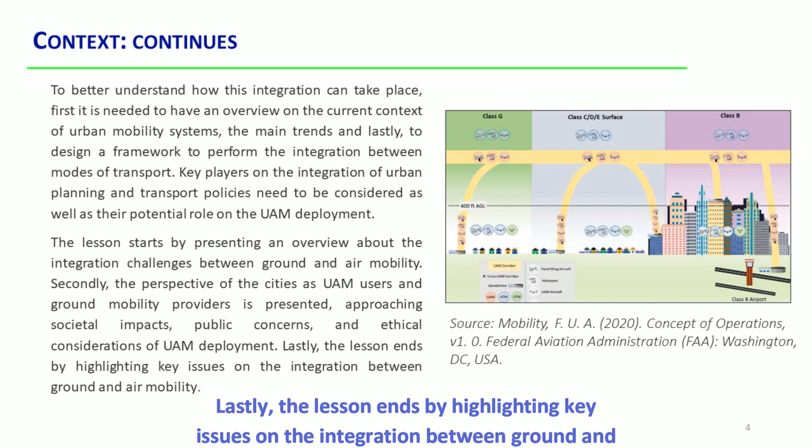Cities are grappling with negative impacts associated with transportation, such as congestion and pollution, as the world population increasingly concentrates in urban areas. To address these issues, cities are implementing various strategies like congestion charges, improving and promoting public transport, and encouraging non-motorized transport. Furthermore, technological advancements in urban mobility, such as automated, connected, electrified, and shared (ACES) mobility, are...

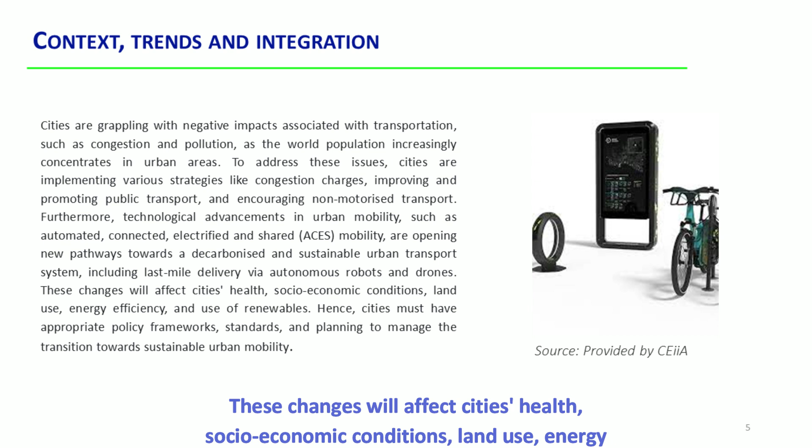...opening new pathways towards a decarbonized and sustainable urban transport system, including last-mile delivery via autonomous robots and drones. These changes will affect cities' health, socioeconomic conditions, land use, energy efficiency, and use of renewables. Hence, cities must have appropriate policy frameworks, standards, and planning to manage the transition towards sustainable urban mobility.

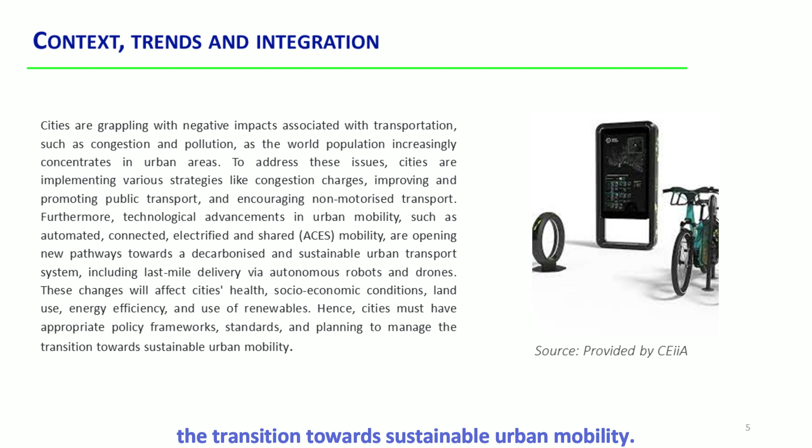Cities are soon expected to integrate the emergent concept of air mobility in specific niches of markets and transport segments. Air mobility is an aviation industry term for on-demand and/or automated passenger or cargo carrying air transportation services for urban environments. This innovative concept introduces an added mobility layer to a city's existing network, aiming to contribute for a better and more sustainable commuting system.

The lack of homogeneous guidelines and different levels of maturity from cities to face this emergent mobility challenge turns the subject of the integration of ground and air mobility crucial for a successful deployment of the latter one.

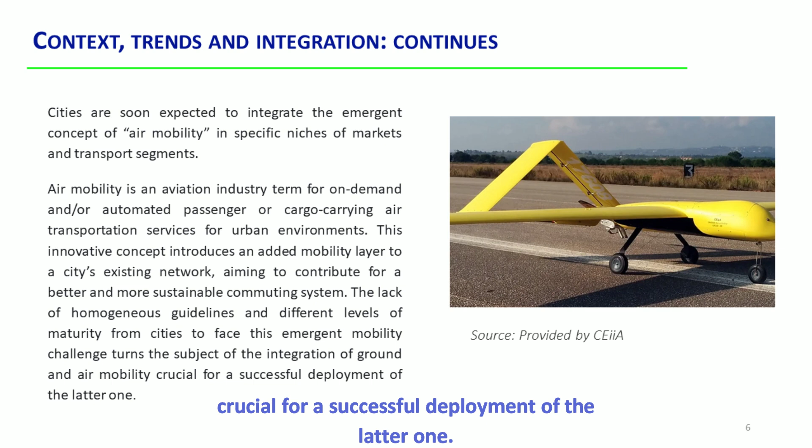Transport integration is an organizational process through which the planning and delivery of elements of transport system are brought together across modes, sectors, operators, and institutions with the aim of increasing the net environmental and societal benefits. The UAM deployment must be looked under an approach that promotes the integration of different modes of transport, considering three main imperatives: physical interface between modes, operational integration between modes, service integration.

An integrative framework for promoting physical interfaces between different modes of transportation should include examining spatial agglomeration concepts, optimizing multimodal networks, considering institutional dimensions and implementation drivers, and combining value creation and capture in infrastructure and spatial development.

The integration of physical infrastructures alone is not sufficient to achieve seamless mobility, and operational integration is necessary. The operational integration ensures that the offered network from different modes is compatible and creates added value with its integration. The operational integration is strongly related with the service integration layer, which allows a commuter to use the same service system to get different modes of transport within a specific area.

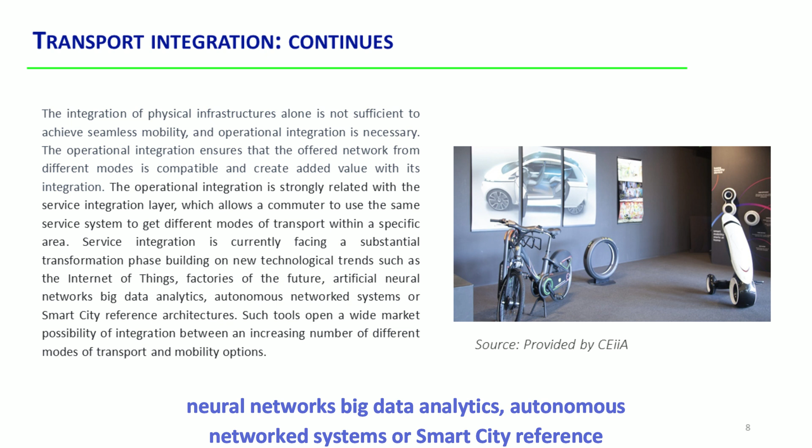Service integration is currently facing a substantial transformation phase building on new technological trends such as the Internet of Things, factories of the future, artificial neural networks, big data analytics, autonomous networked systems, or smart city reference architectures. Such tools open a wide market possibility of integration between an increasing number of different modes of transport and mobility options.

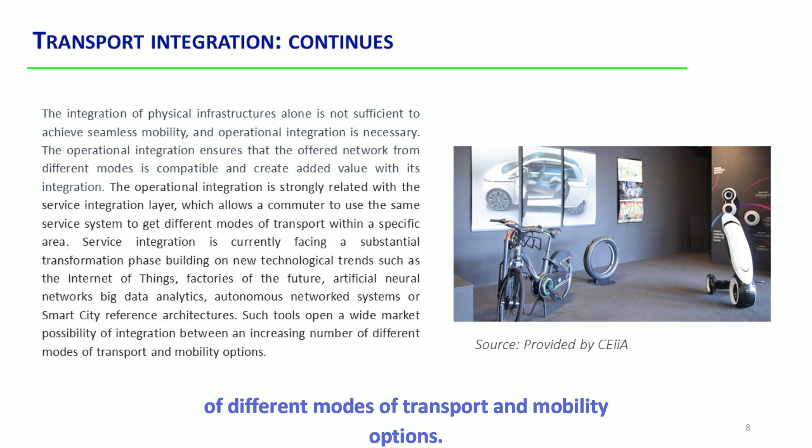The concept of smart city is a place where traditional networks and services are made more efficient with the use of digital and telecommunication technologies for the benefit of its inhabitants and business. A smart city goes beyond the use of information and communication technologies (ICT) for better resource use and less emissions, assuring a more interactive and responsive city administration, safer public spaces, and meeting the needs of an aging population.

In an era of increasing ICT to support urban functionalities, municipalities are also part of this ecosystem and have the potential to examine, understand, and define their own specific urban data, to work out and implement the necessary processes for data provisioning and data management, to build a powerful data infrastructure to support and automate these processes and to ensure their own municipal data sovereignty.

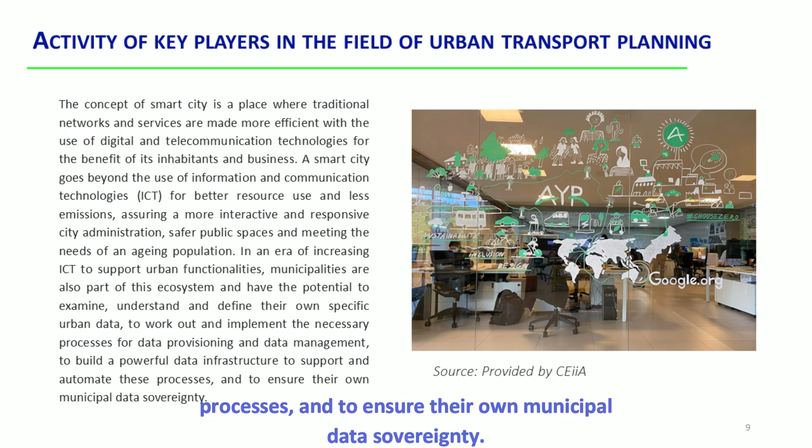The integration of air mobility in European cities faces emergent challenges, and three key players can provide guidelines and support to address them. The European Initiative, the marketplace of the European Innovation Partnership on Smart Cities and Communities (EIP-SCC), City Vitality and Sustainability (CIVITAS), and ELTIS offer tools, good practices, and communication channels to help cities become models of sustainable urban mobility.

EIP-SCC has a UAM action that steers its activities on smart mobility initiatives, interfacing or enabling UAM by addressing UAM interfaces with public transport, mobility as a service, ground infrastructure for UAM, and ATM-UTM concepts for UAM integration.

The third dimension of air mobility is still not a pertinent topic for most European cities, and therefore it is still not a relevant topic for CIVITAS and ELTIS, but it could be desirably included in SUMPs.

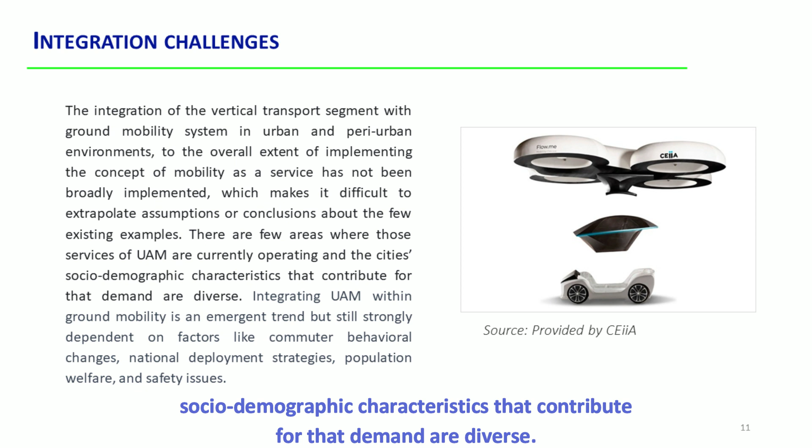The integration of the vertical transport segment with ground mobility systems in urban and peri-urban environments, to the extent of implementing mobility as a service, has not been broadly implemented, making it difficult to extrapolate assumptions from the few existing examples. There are few areas where UAM services currently operate, and the cities' socio-demographic characteristics contributing to demand are diverse. Integrating UAM within ground mobility is an emergent trend but still strongly dependent on factors like commuter behavior changes, national deployment strategies, population welfare, and safety issues.

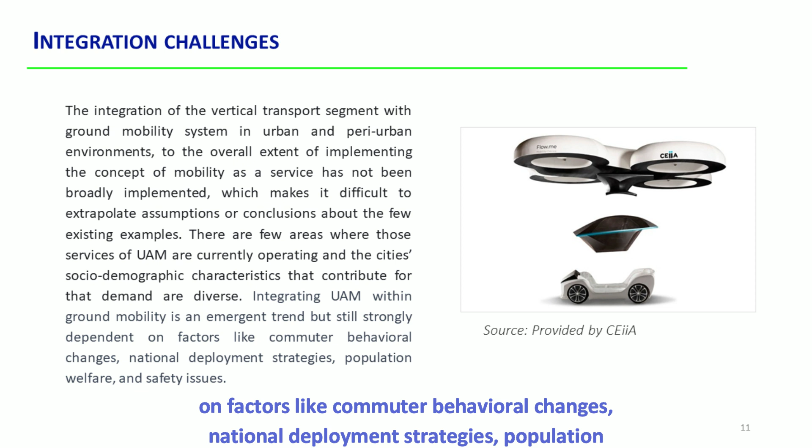The integration of UAM services in the overall urban transport chain must incorporate three main indicators of sustainability: societal impacts of transport activities, public concerns, and public acceptance and ethics.

Societal impacts refer to both potential benefits and negative impacts of UAM affecting society. The deployment of drones has potential benefits such as reducing traffic congestion and improving healthcare, delivery, and search and rescue services. However, concerns have arisen regarding job losses, limitations in adverse weather conditions, noise pollution, and aesthetic impact on the environment.

The deployment of UAM sustainable systems must consider public concerns and acceptance, including safety and security. Concerns include the consequences of malfunctioning navigation systems, collisions with people, cargo loss, and misuse of data or terrorist acts. Communication between drones and controllers using Wi-Fi networks is also vulnerable to security breaches.

To gain public acceptance, trust and transparency in UAM integration strategy are crucial.

UAMs also offer advantages for security purposes, such as providing broadband data rates in emergency and public safety situations, search and rescue, and creating unmanned aerial base stations during natural disasters or extreme events to improve coverage and save lives. They can also be used for surveillance during war situations and to avoid human casualties.

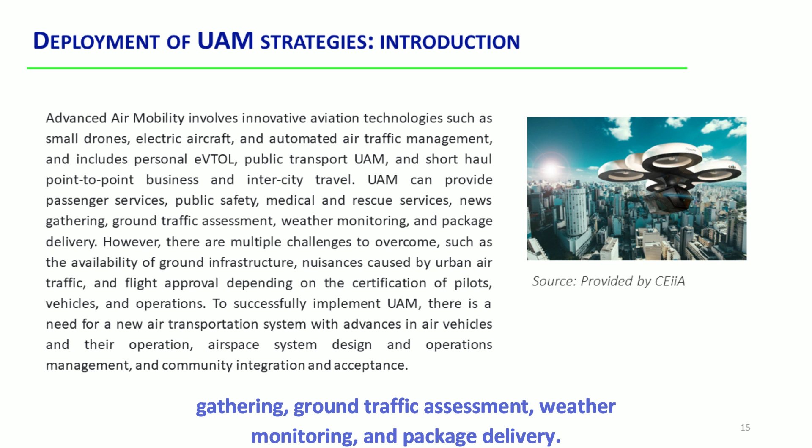UAM can provide passenger services, public safety, medical and rescue services, news gathering, ground traffic assessment, weather monitoring, and package delivery. However, there are multiple challenges to overcome, such as the availability of ground infrastructure, nuisances caused by urban air traffic, and flight approval depending on the certification of pilots, vehicles, and operations.

To successfully implement UAM, there is a need for a new air transportation system with advances in air vehicles and their operation, airspace system design and operations management, and community integration and acceptance.

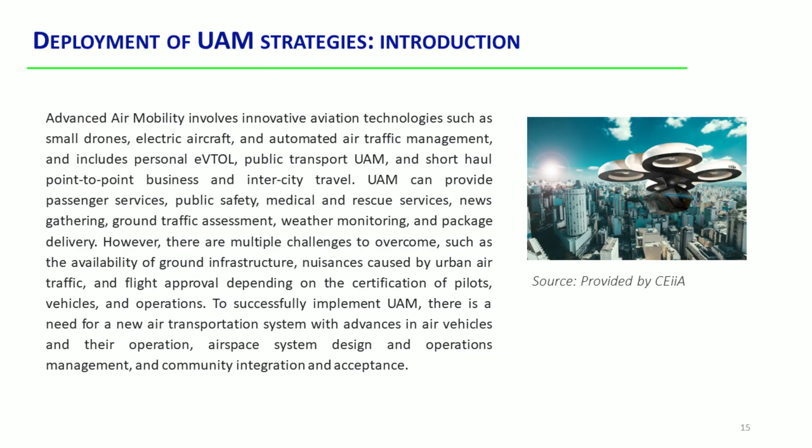The main factors expected to influence the implementation of urban air mobility strategies include economic drivers, regulations, technology development, social acceptance, and infrastructure.

In what refers to technology development, it is expected that the major contribution to UAM is vertical takeoff and landing, VTOL aircraft, which embraces the door-to-door, D2D paradigm. Other enabling technologies for UAM include short takeoff and landing, STOL aircraft, and personal air transport system, PATS aircraft.

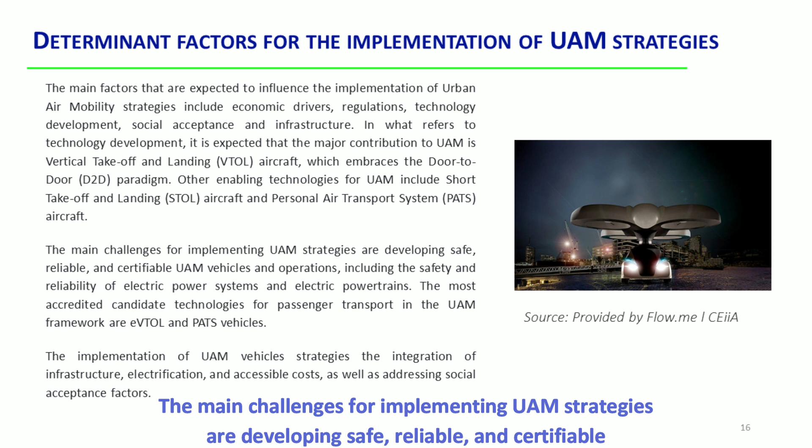The main challenges for implementing UAM strategies are developing safe, reliable, and certifiable UAM vehicles and operations, including the safety and reliability of electric power systems and electric power trains.

The most accredited candidate technologies for passenger transport in the UAM framework are eVTOL and PATS vehicles, the implementation of UAM vehicle strategies, the integration of infrastructure, electrification, and accessible costs, as well as addressing social acceptance factors.

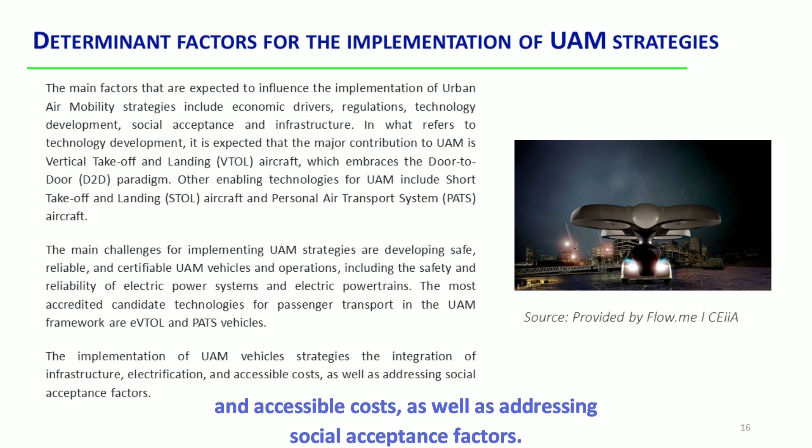Sustainability and technology integrability are critical aspects to consider in UAM infrastructure development, including the development of new runways on building roofs and the availability of STOL, VTOL, and PATS technologies. The integrability of these systems will have a significant impact on urban infrastructures.

A depth analysis of infrastructures and prices of public transport services is needed to ensure an optimal price and investment that affect acceptability. Improvements in endurance and weather resilience will depend on technological developments relating to vehicles, while integrability will involve regulatory aspects and urban infrastructures.

The integration of technology in multimodal transport requires digitization in road and air transport, and the integration of air and road traffic management systems. Urban air mobility UAM solutions can be applied to automated road transport for multimodal vehicles.

Pop.Up is a modular system for multimodal transportation that utilizes ground and airspace, consisting of a passenger capsule, ground module, and air module. Passengers can switch between modes of transportation, and the modules autonomously return to recharge stations after use. This system aligns with the deployment of UAM, providing both surface and air transportation to reduce city traffic congestion.

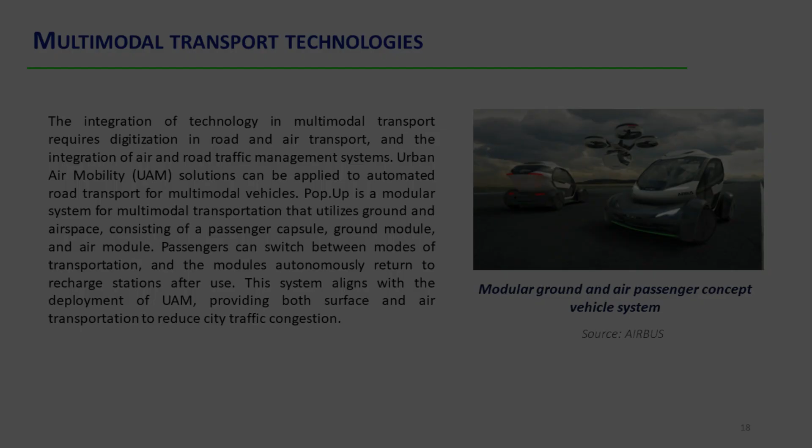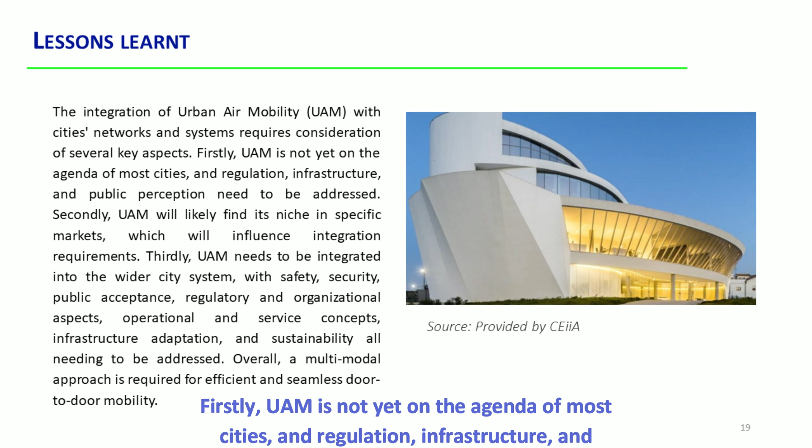The integration of urban air mobility, UAM, with cities' networks and systems requires consideration of several key aspects. Firstly, UAM is not yet on the agenda of most cities, and regulation, infrastructure, and public perception need to be addressed. Secondly, UAM will likely find its niche in specific markets, which will influence integration requirements.

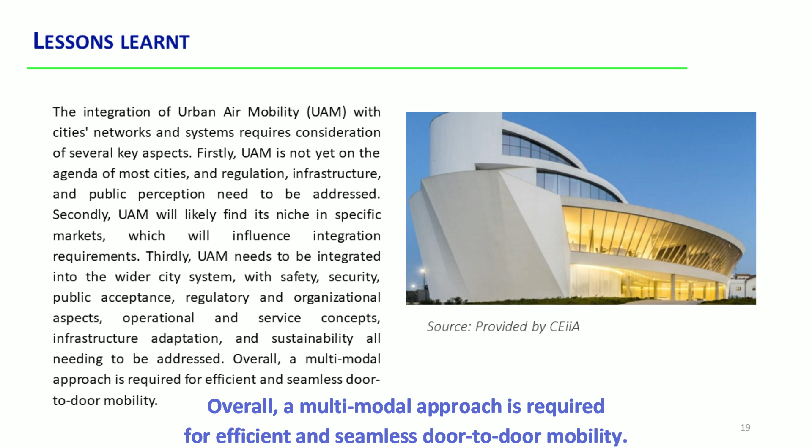Thirdly, UAM needs to be integrated into the wider city system, with safety, security, public acceptance, regulatory and organizational aspects, operational and service concepts, infrastructure adaptation, and sustainability all needing to be addressed. Overall, a multimodal approach is required for efficient and seamless door-to-door mobility.